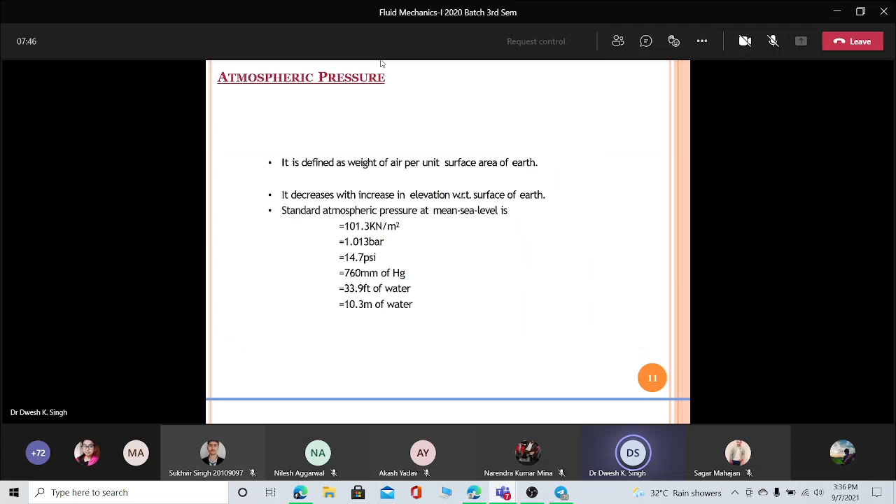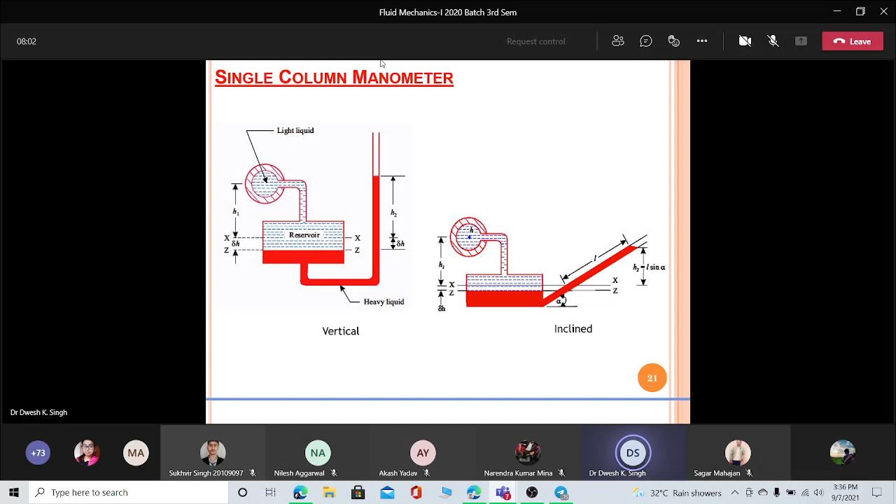I have completed all this now. We will discuss today what we have discussed, this manometer basically - what is this piezometer, manometer, and the different types of manometer like differential manometer, U-tube manometer, and single column inverted tube manometer. Inverted tube means the tube will be inverted in the upward direction. And also we have discussed this Bourdon gauge.

Okay, now today we will discuss this part, the hydrostatic force basically. So hydrostatic force, we are already aware of this. What is this hydrostatic force? This is basically the basic expression for the force. Here what you need is just put the equation of the pressure, that is del P by del Z is equal to rho G.

So you need to put this here. When you will multiply here dz, it will come out rho g into dz. And here we need to integrate this. When you will integrate this, you will get the pressure acting at a particular height. So this will be your hydrostatic force.

This we know, and it is the summation of the product of uniform pressure and elementary areas of the submerged body. Uniform pressure means if there are no further variations or disturbance in the fluid, so it will be like this, because it is static. So your pressure is basically like force is pressure into area. So as we told, this is the pressure force, the force exerted by the pressure.

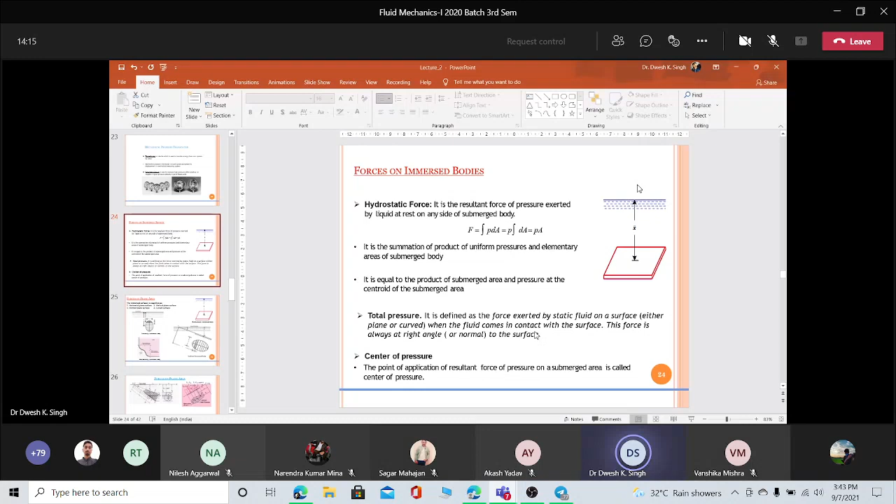So hydrostatic force means the force which is exerted due to the height of the fluid above the surface, means the forces on the immersed bodies. So look here, this is your immersed bodies. So what is the force acting on this surface due to the fluid which is above this surface? And that fluid is in the static condition because this is hydrostatics. Okay, so that is called the hydrostatic force.

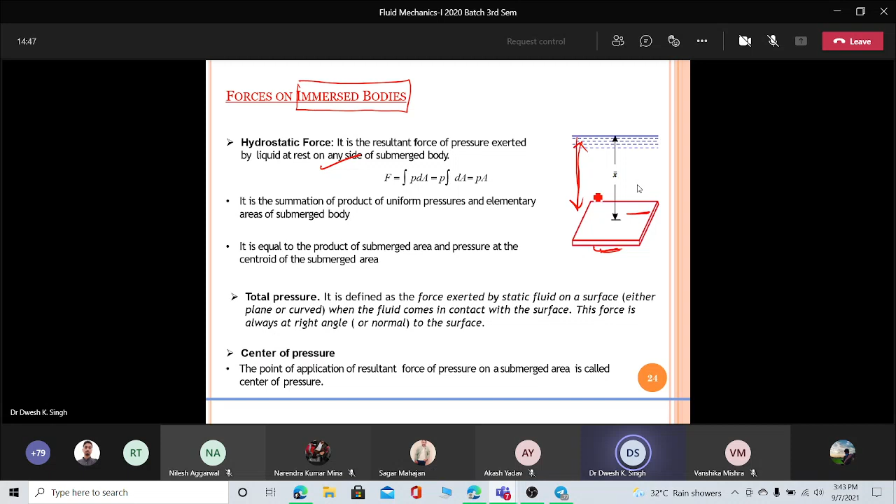The equation we have already discussed, that is F is equal to... so it will ultimately come out like pressure into area will give you the hydrostatic force. So it is just like the summation of product of uniform pressure and the elementary area. So this is the definition of basically hydrostatic force, which we are familiar with.

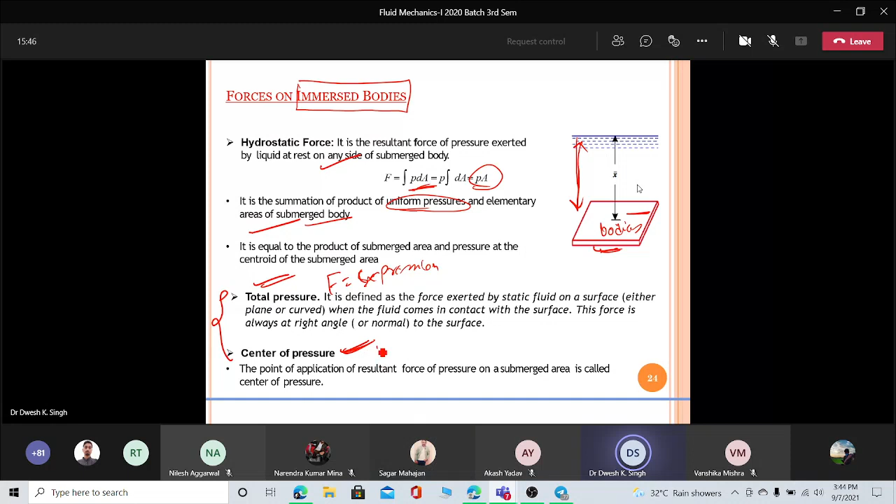But the important point in this topic is we are going to find out the total pressure acting on this type of body which is immersed in the fluid, and where this force is acting. This is our concept, so we are going to discuss this. The total pressure means the expression of this total force - this we have to discuss. And the point where this total force will act is called the center of pressure. Am I audible?

Yes, sir. Okay. Yes, sir.

Now, as I told you, this topic is related to force acting on immersed bodies. We have some classification of these surfaces: vertical, horizontal, then the curved body, horizontally immersed curved body, and the inclined bodies.

First let me clarify that a vertical body means when we have height. Let me show you. Suppose I am holding this - is there any height? No, sir. Now what is this? Is there any height? Yes, sir. So this height variation can generate pressure at different points, different pressure at different points.

So this is the vertical case and this is the horizontal case, and this is your inclined case when your body is like this. And sometimes we have a curved surface also like this. So these are the different types of bodies which generally occur in practical applications, and this is what we are going to discuss.

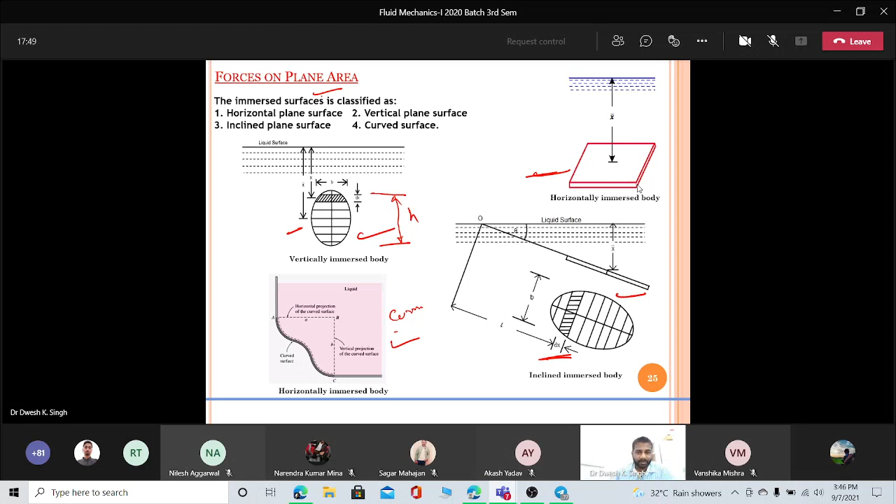So first, in which there is a height. Curved means there is a horizontal and vertical component both, which we will discuss. This is the inclined - actually vertical and horizontal are cases of inclined basically. So let us first find the equation for the force - what is the expression for the force basically.

Now let us consider this is our body, and I am taking here the example of that incline basically. From the incline we can easily discuss the horizontal and vertical. So first we are going to discuss the incline, and vertical is a special case of incline. Horizontal is also a special case of incline. So it is better to discuss incline first.

So this is the inclined body here, making angle theta. Look at this - this is our inclined body, drawn for convenience. And obviously there is a fluid above this body. These are the fluid areas, meaning this body is inside a fluid.

Now this is actually h, the vertical height, and y is the inclined height from this axis. If you draw any axis from this surface, perpendicular to this surface, look there - this is actually y, the distance from this axis, that is OX, which is perpendicular to the surface of the body. So there are two distances: h, which is the vertical distance from the surface, and y, which is the inclined distance from the axis OX. I think it is clear now.

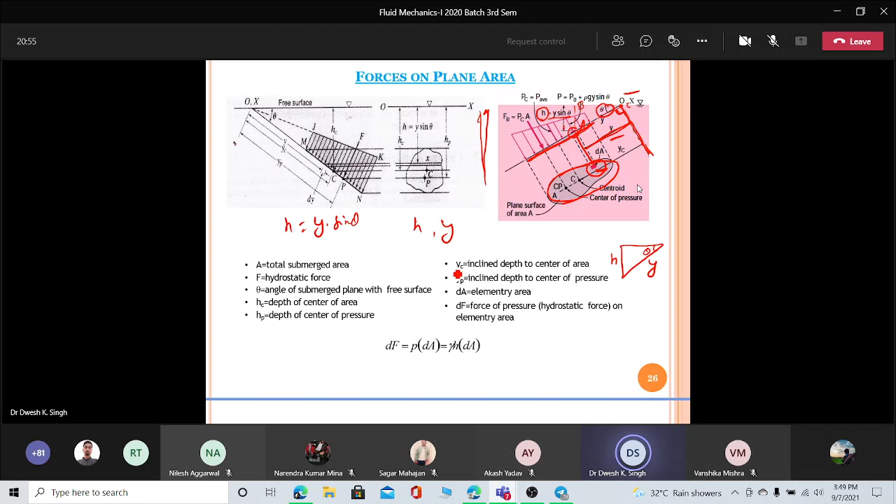These are the inclined depth, all these things mentioned here, that is elementary area. This figure is saying the same thing - look here, that is vertical distance, and HP is the distance of total pressure, meaning this P point is where the total pressure acts, which is here, and this C point is the centroid of the body, at a distance YC. The pressure is at a distance YP from this OX axis, and centroid is at distance YC from the OX axis, and y is the distance for any elementary area, like here we have taken. Let me erase this, then it will be clear to you.

Okay, so this is your elementary area. We are going to choose this elementary area, and then we will do our exercise for finding the total expression for total force and center of pressure.

So this is the distance where this elementary area lies, that is y. Correspondingly, you can change this distance, this inclined distance, in terms of h. Like here, look at this: that is your HC, that is your HP. So obviously HC will be equal to YC sine theta, and HP, which is the point for the total pressure, will be like YP sine theta.

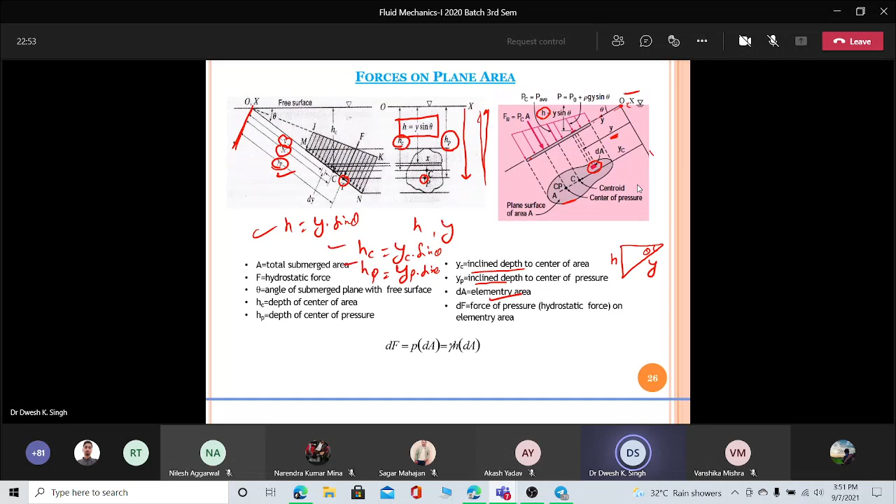Like here we have the value that is YP. So these are the relations. So we have the two distances, one from the vertical and one from the incline, and these are the relations. So this you have to keep in your mind for the further operation.

Okay, now let's choose this diagram. Now what is the pressure acting on this body, the elementary body? What I am talking about is the elementary part here, that is P. Obviously the pressure will act on this body into area.

So what is the expression for this pressure? We know that P is equal to rho g into H. So we can write this as gamma into H. That gamma actually we have taken here - that gamma is basically rho into g. So look at here, when you add this it will give you this pressure here. When you put this, it will come out the expression.

Now let's change this H in terms of y by using this relation as I have already discussed. Now put this expression here and integrate for finding the pressure over the entire body, means over this entire body. For finding the pressure on the entire body, obviously we have to do the integration. When you do the integration, you will come out with this expression.

Just substitute all these relations here in this expression at the place of H. Gamma is same here, no need to change this gamma. Now this gamma is basically density and gravity, so these two are constants, so obviously this will come out of the integration sign. Also this theta is fixed - if it is not changing, then obviously it will be fixed. So this can also come out.

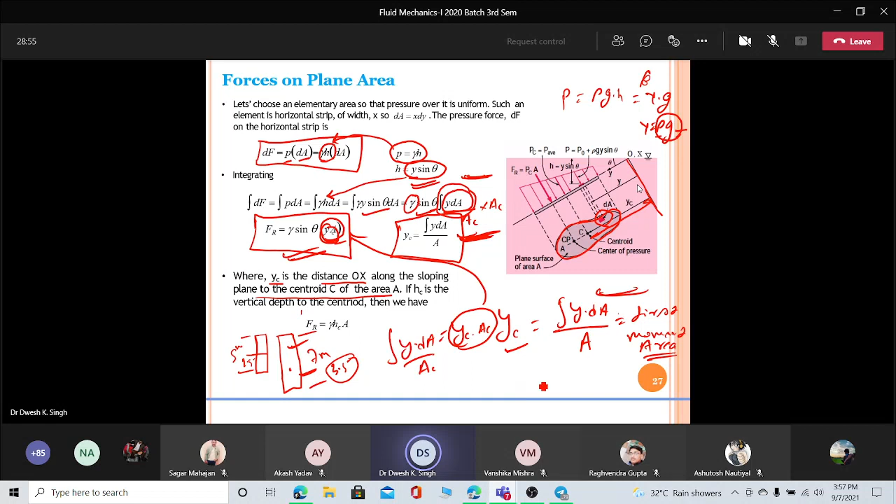So this YC defines what will be the force, the total force that will act on that body. And in short, you can express it in the form of H, because we have the expression H is equal to YC into sine theta. So you can substitute this. Look here, we have the YC, let me erase this.

What happens here? Let me erase this formula. Carefully look at this expression. We have sine theta and YC. Here actually this C is here. So we can replace this YC sine theta with HC. What is HC? It is the vertical distance from the free surface, vertically downward. This is not vertically downward, this is inclined, and H is the vertically downward. So if you have the value of this, you can also find out the total force acting on the body, meaning the vertically downward distance.

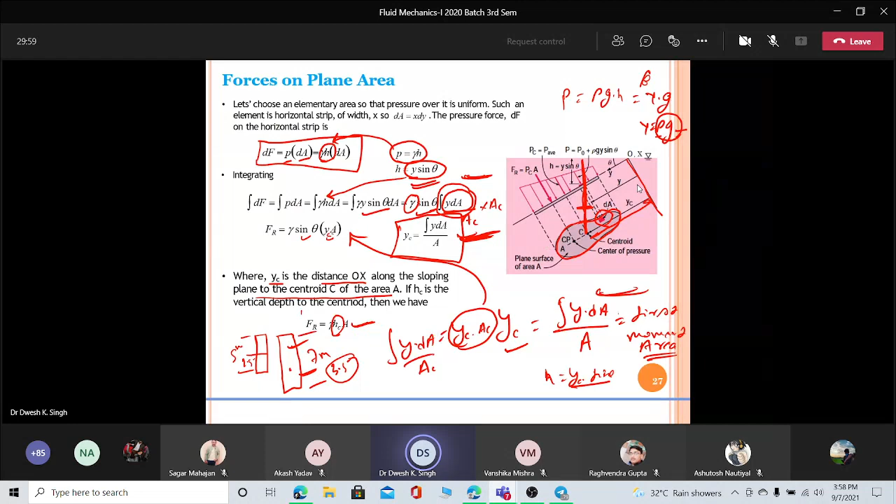Now the next is to find out the center, meaning where this force will act. The question is where this force will act.

Is the screen visible? Hello. Yes, sir. Okay. Yes.

So this is actually the same thing, but here one more important point to discuss: during finding this total force on any plane area, you multiply simply the specific weight - this gamma is the specific weight - with the vertical height and the area. The area of the bodies you already know, because you know what bodies you are going to use in your application. And you are also very much aware of the fluid, so it is only the H which we need to decide, what is the appropriate H to maintain a static condition so that your system will not collapse or get damaged.

So this is the key point, just find out the H in the static case. In all static conditions, if you remember the classes till date, you will find that all the time it is only the game of this H. So all the time, what you need to find, all the time, is H. H is very important in the static case.

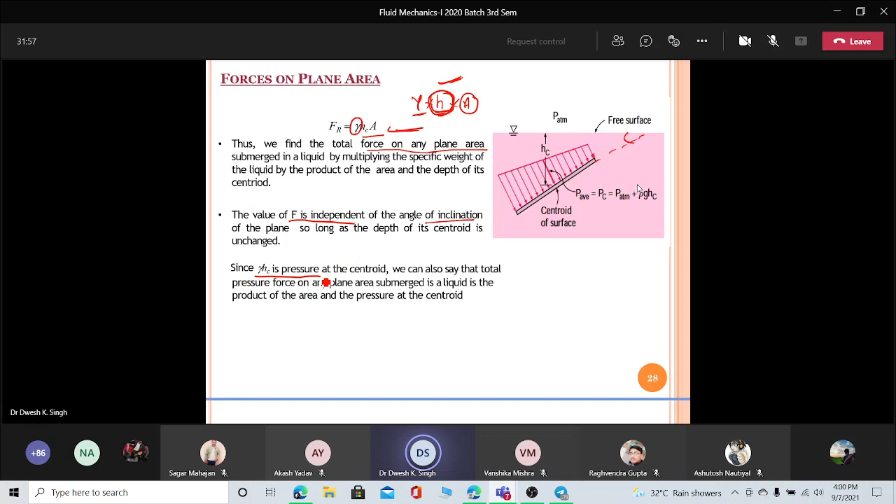And since gamma times H is the pressure at the centroid, we can also say that the total pressure for any plane submerged in liquid is the product of area and pressure, that we know. Now the next is center of pressure, meaning how we can find out the center of pressure.

For finding the center of pressure, it's very simple. Now look at this - let me give you the example of the vertical because it will give you a more accurate picture than this inclined case.

Okay, let me take this. Obviously, if there is a fluid behind this body, just try to understand - let us suppose this dot line is the fluid. So obviously, due to this height, there will be a pressure force acting. Let us suppose it is acting here like this - this is your pressure force, that is Fp, which is generated due to this height of the fluid.

Now look here - obviously if this is the distance, and if I ask you to find out the moment about this point, then obviously you can find out this moment. So I mean to say there is some moment effect inside this body. So how can you find out this moment?

So look here, this is your force - this Fp is the force acting here. Take the moment about this point, so that moment is y into dF. Just take an elementary area and the distance for finding it, that is y.

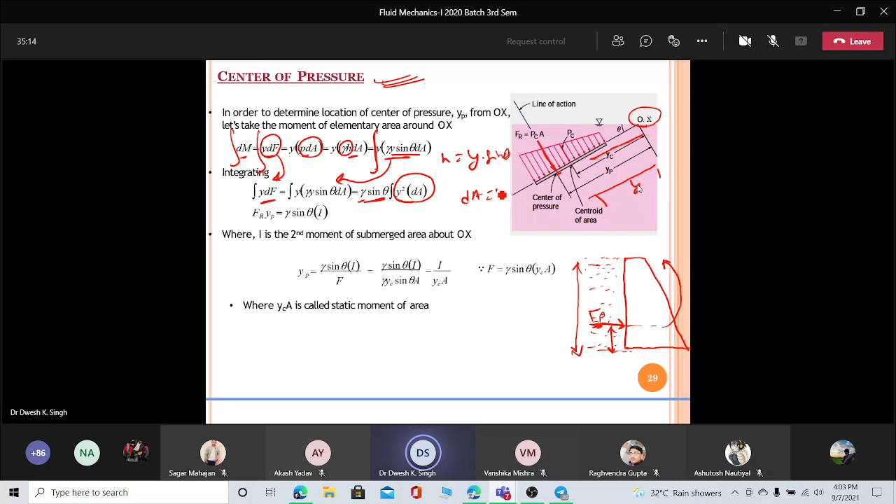Again, these are the constants. As we discussed earlier, gamma, that is rho g, is the constant. So what we have now is only this term, y, because we know that y varies. Look here, this y varies, so we have to do the integration of this. And here, if y varies, then the area will also vary. Like here, you can take dy into any width, just take a unit here.

Ultimately, tell me what does this expression show here? Y square into dA, what is this showing? Who will tell?

Am I audible? Yes, sir. Now what is this?

The first moment of area. It is the second moment of area, which is basically the inertia.

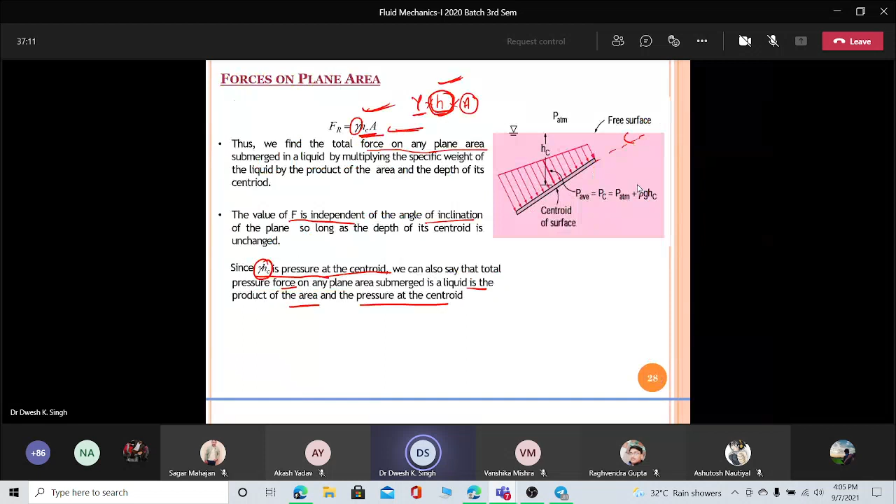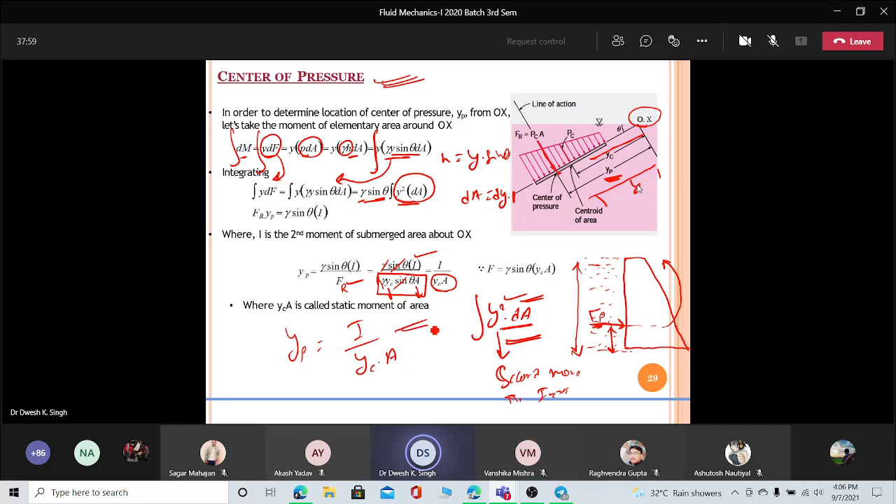So Fr is gamma yc sine theta A, that we have already derived. So here you can see that this sine theta will be cancelled out, and that gamma will also cancel out. So what we will have is the moment of inertia divided by yc and this area. So that is yc into area. So this is the expression, meaning yp is actually equal to I by yc into area. So this will give you yp.

Again, if you use the parallel axis theorem, what it says is that this is the centroid plus the distance between the axis and the centroid, the area into the distance, that is yc square. So this is your axis and this is the centroid. So this yc is the distance, so area times the square of the distance between the axis and the centroid point.

So now substitute this here in this equation at the place of I. Ultimately you will come out with this. Now what is this Ic? Ic is the moment of inertia about the centroid, about this centroid point, this point.

Clear? Now when we do the separate work here, the first term will come out as Ic by yc by A, and the second term, look here, y and y will be cancelled out and one y here will be cancelled out. So there will be only one yc. So this is your final expression for finding the center of pressure.

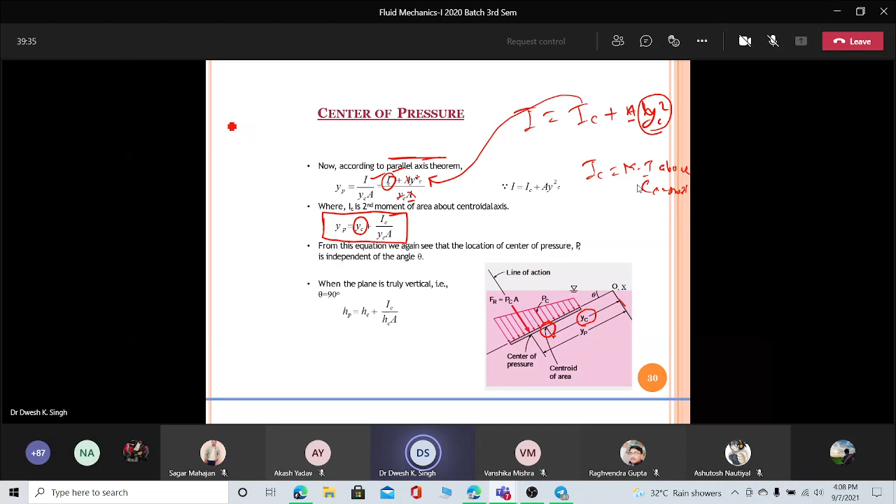In terms of H, we know that H is equal to, we just need to use sine theta, like H is equal to yc sine theta. So here you need to substitute this at every place here.

Now, as I told you, the vertical case is an example or a special case of this inclined case. So now for making the body vertical, what will be the angle theta? It will be 90 degrees. When it is 90 degrees, look here, this will be the case of vertical. So what we need to do is substitute this theta here.

So if this is theta, then YC is simply equal to HC. Just put sine theta, since sine 90 is equal to 1, it comes out YC is equal to HC. So look here, YP will be equal to HP, and YC equal to HC. So this is the expression for the vertical case and this is the expression for the inclined case.

Now the relationship between the vertical and inclined case is this: Y is equal to H sine theta. By putting this, you can derive the inclined case and you can also get the vertical case. So this is the case for the...

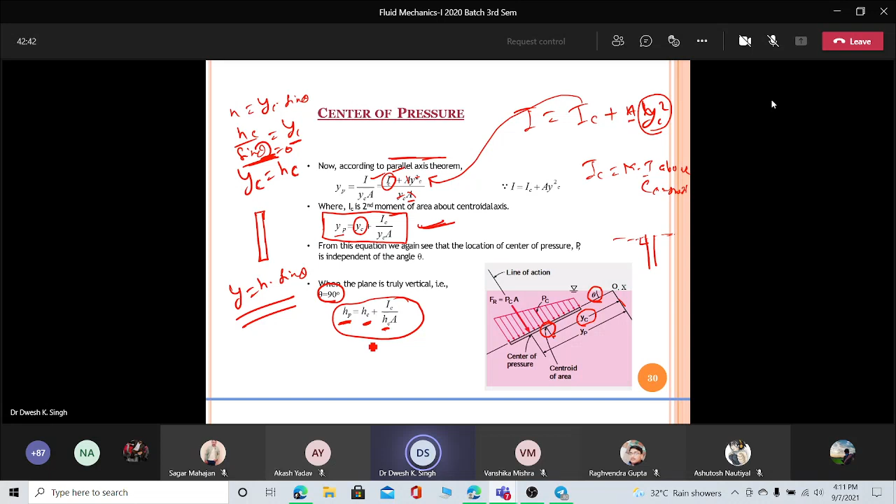So this is the case when the centroid and the center of pressure coincide, because there is no variation in the height. So obviously these two points will coincide at the same vertical height, remember, same vertical height.

And also the expression for total pressure will be the same. But you only need to understand that these two points, HC and HP, coincide here because there is no variation in the heights. So there is no need to develop any other expression, because we don't have the height variation.

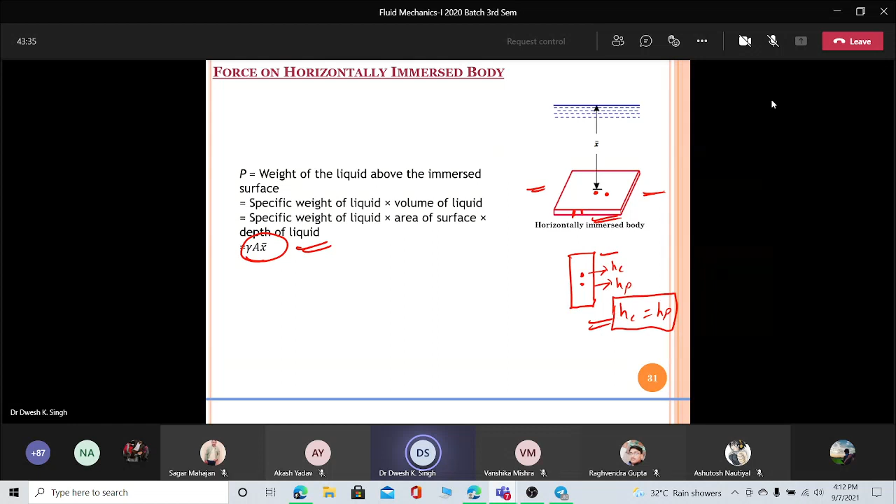Now we have certain bodies which you need to apply this to, these are the bodies you will observe during numerical solutions, along with their corresponding area and moment of inertia. I think you have already used these relations, but here in this static chapter you are again going to use this moment of inertia, because we have the moment of inertia in the expression. So you will require this during the numerical solution.

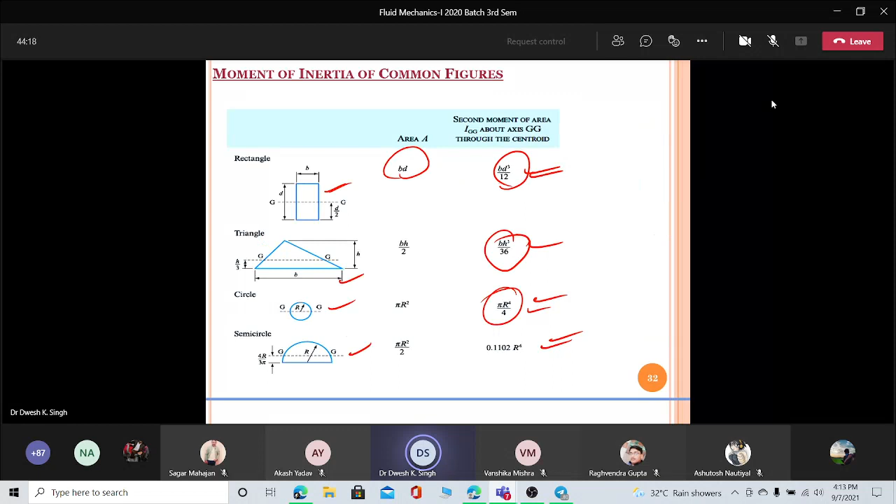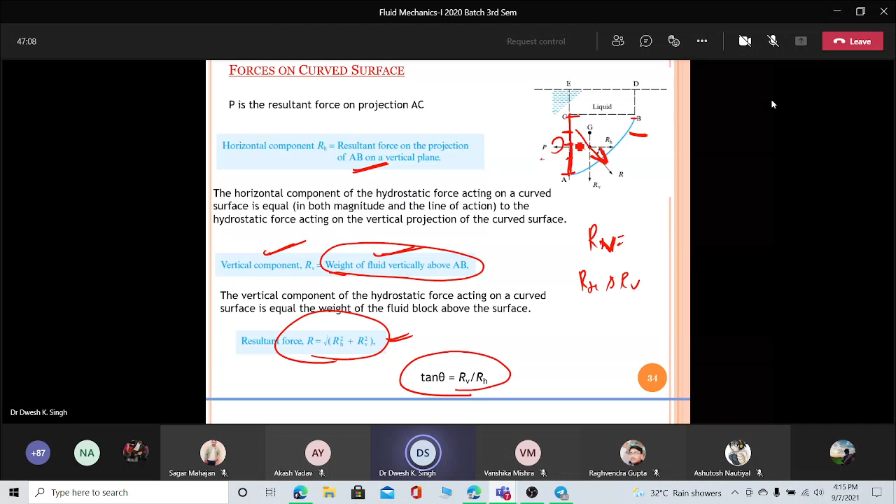So when you have this RH and RV, we need to use them to find the resultant force, which will give you the resultant, and by doing this you will come out with the angle. So here one more point is added, the vertical component, meaning the vertical component of the pressure which is acting here. This vertical component is generated due to the weight above. So here comes two pictures: one, the pressure force which acts on this surface, and one which acts on this BC face. So these are the two components.

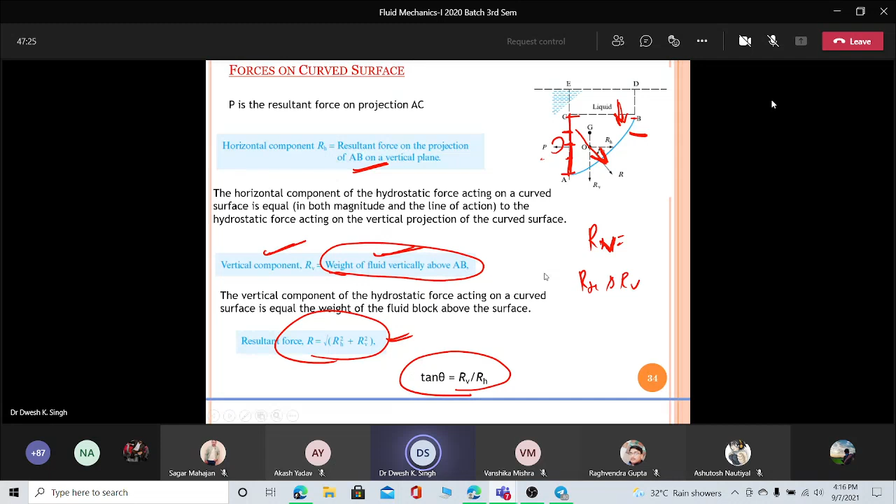Now let me show you another thing. I want to discuss what is the need for this. Let me find this page. It is here.

Now the application of this hydrostatics is in the dam. Look here, this is our dam. What happens? Why do we need hydrostatics here? I think all of you are aware of the dam.

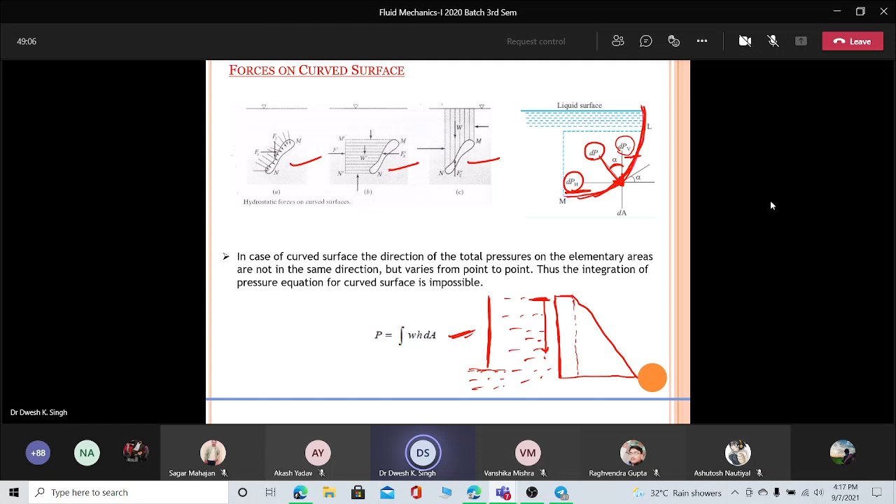So you will always find that the shape of the dam is like this. You will find it is very thick at the bottom level, because the maximum weight is supposed to concentrate at this point. We know that for this type of triangular shape, the centroid is located at 2/3 from the apex. That's why we develop this type of shape, so that our objective is to take the weight to the bottom of the dam. Why the bottom? Because there is high pressure at the bottom, since it increases with depth.

Now let us suppose that the pressure acting due to this fluid is more than the weight of the dam. Then what will happen? It means there will be two moments: one which will try to topple, meaning overturn, this dam. So sometimes you will hear that the dam has failed. Why does it fail actually? It fails because if the pressure is very large, it will start to topple from the bottom like this.

If this is your X, it will start rising because the pressure will act and try to rotate this dam. Considering this as the point, the dam will rotate about this point, about this point. It will start toppling like this. So this is the point where you need to take the moment.

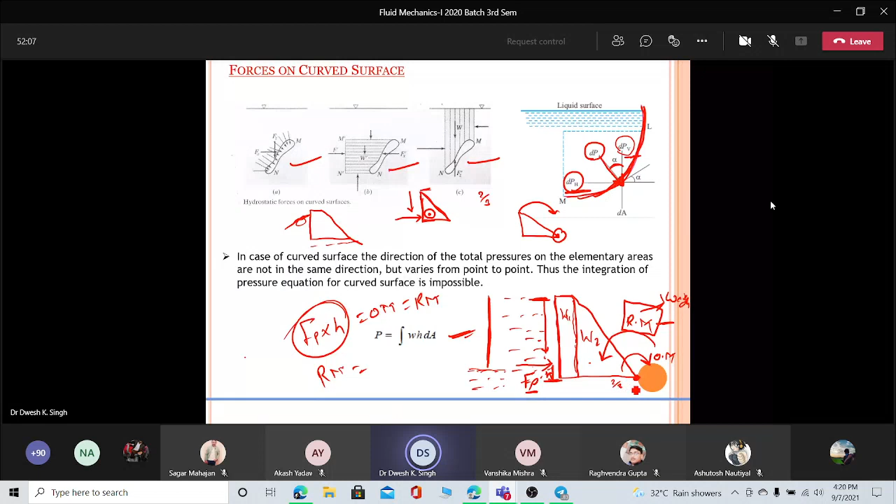So look here, we need to find out first where this weight will act. Obviously it will act at some point, that is 2/3 from this. If this is the total height H1, then 2/3 of it, so this will generate W2 into 2/3 into H1. Now here it will act at the mid of this, so that is 2/3 H1 plus this height also, if you have this length like H2.

So this will be like plus W1 into 2/3... and this is actually not 2/3, this is what we need to work out, that is H1 minus this. So this is not 2/3 here, it will be like H1 minus H2/2. So this will give you the resisting moment, and for equilibrium, this resisting moment should be greater than the overturning moment.

What happens sometimes during the flood, the height of the fluid goes very high, and due to which this force FP is very large, so large that RM becomes very close to OM, and your dam will fail. Because with the flood, there is a turbulent effect also. If RM becomes equal to or smaller than OM, combined with the turbulent effect, since during the flood the fluid is in turbulent motion, that turbulence is also a factor.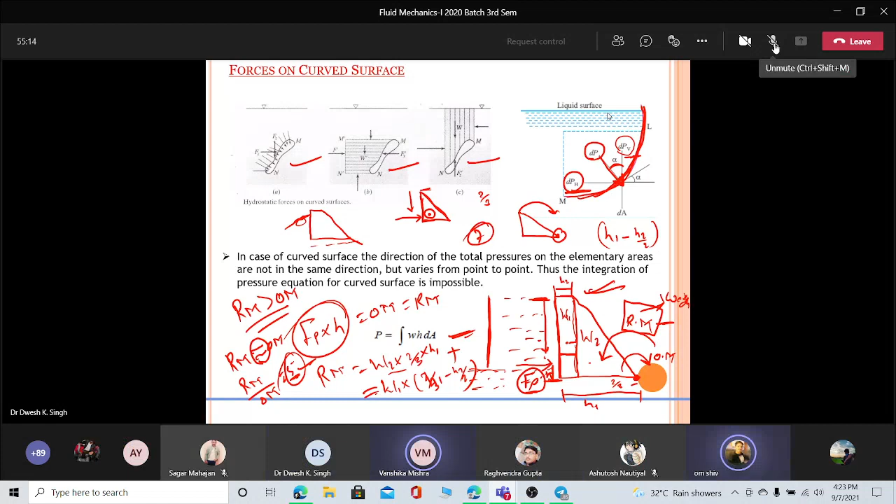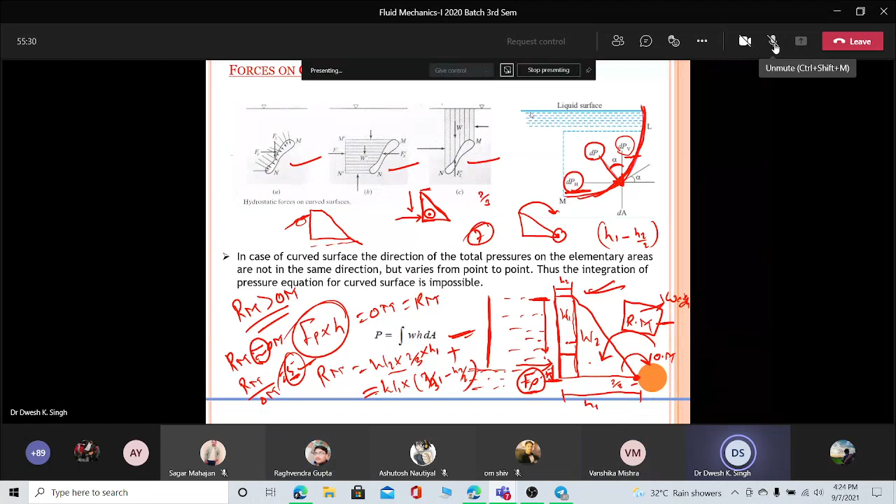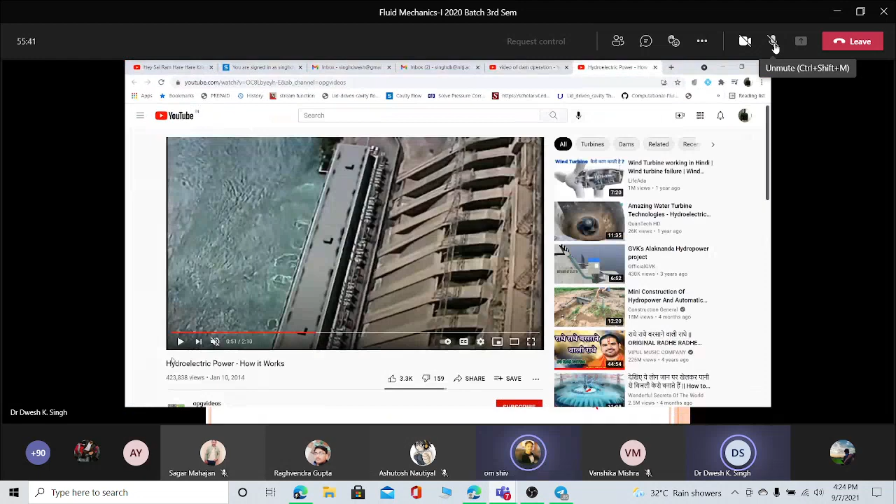Which screen is visible right now? Yes sir. Is this screen visible? Yes sir. Okay, I am playing a diagram here, basically for the clarification of this dam.

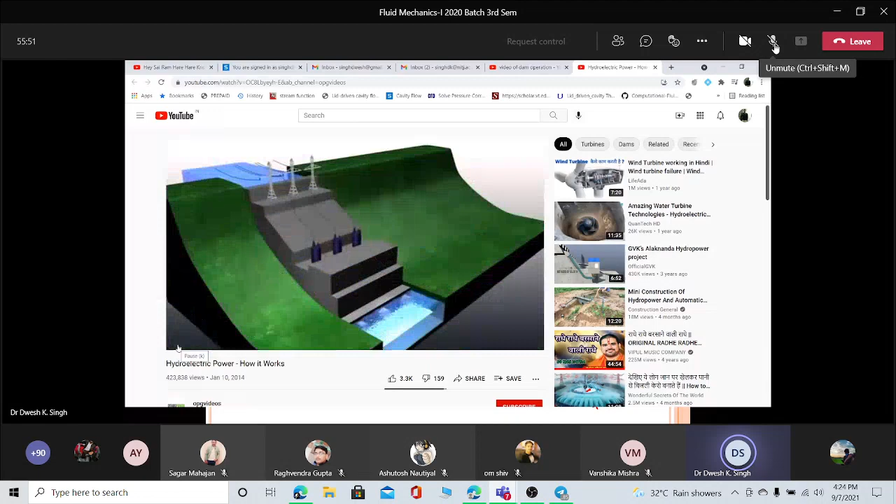So you can see the example here, why we need the dam and what is the role of this dam. Actually the water is flowing through this section. Are you able to see this arrow? Yes sir. Okay, this is actually called the penstock, and with the help of this penstock we direct the fluid towards the turbine, and this is our dam height.

So what happens below this, at the lower portion, we do not have enough potential energy. So what we do, we develop a dam, meaning we raise the height of this fluid up to a good level. This level depends on your power generation, meaning how much amount of power you are going to generate.

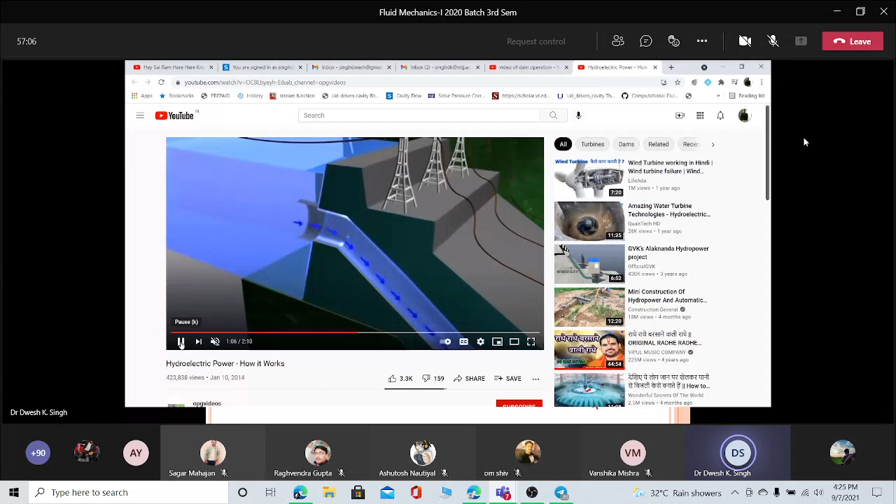So this is basically the example of this static condition, and here we apply all the static conditions. This is an example where we need to apply all the concepts of statics.

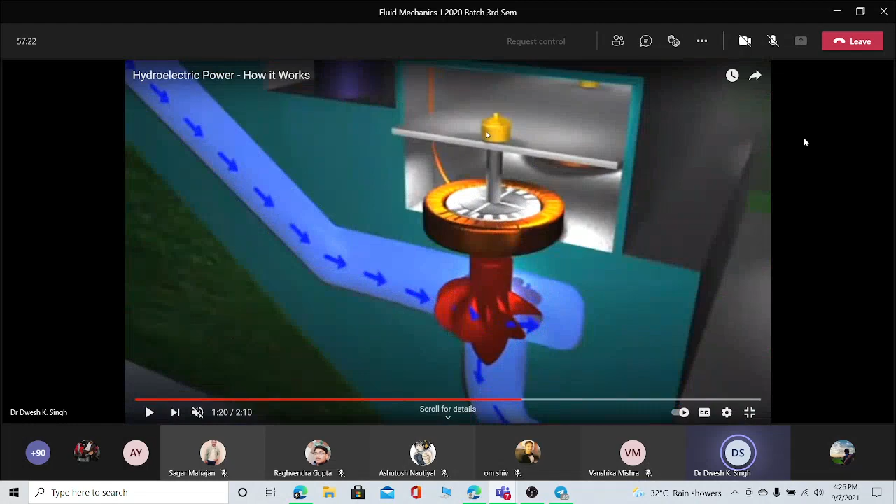So you can see here how the turbines rotate basically. This is the turbine installed at the lower portion. This is our turbine house, and this is the penstock.

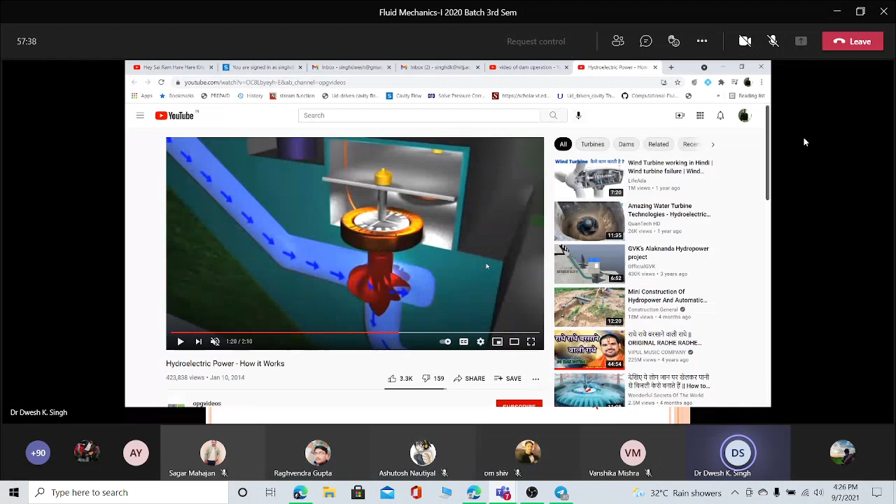Does everyone understand? Yes sir. Okay, so this is your example, meaning this is basically the application where the statics condition holds very good. And as I have discussed, these are the basically the required concepts during the construction of the dam.

So we required the amount of the force, means the height corresponding to that height we find out the force, and then we take the moment, and according to that we set a factor of safety - how many times more than that pressure we need to keep the weight. The more times you keep the weight higher, the safer you are.